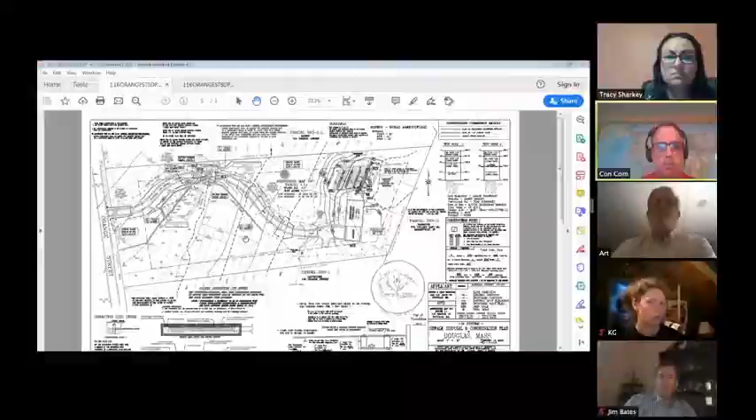Steve, are you there? For Orange Street? Do you know if he's in, Tracy? He was loading up, doing the dishes. Yeah, he's trying to, the other Steve is kind of loud. He's connecting to audio. Am I loud? Let me turn my mic down. Steve and Sue, I think. Oh, yeah, I'm here. I muted them. Yeah, there you go, now it's quiet.

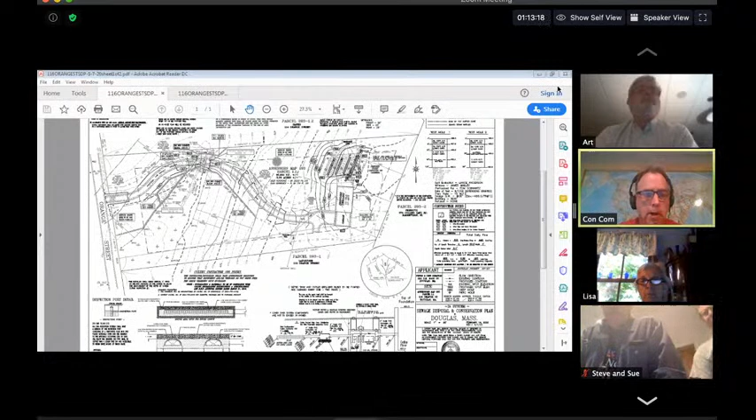Hello? All right, Steve Donatelli, you there? It says connecting to audio. He may be coming in on the phone. Hello, Steve Donatelli, is that you? Ready, Steve? Yes, it is. All right, yes, Steve, how you doing?

Good. All right, so you're first up in the queue, so just maybe give an update. It's been probably two or three meetings. The commission had a bunch of comments that were sent to your board. I think the plans came to the commission last week, so I haven't gone into detail of the changes. One of the major issues, I think, was the culvert itself.

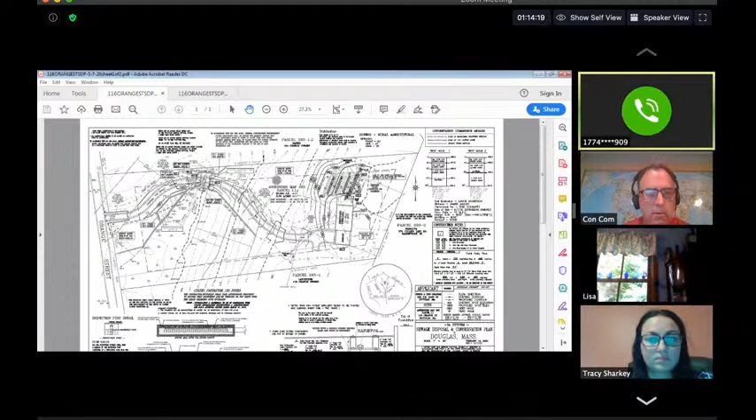Yeah, let's see if I can zoom in. Before you didn't have the stream bank, the stream wasn't marked out. Anytime you have a stream crossing, you have to have what the DEP calls an openness ratio, so you have to have pretty much a three-sided culvert sized enough to let wildlife and habitat and bank flow on either side of the stream crossing exist.

So we're looking for those calculations, the bank to be looked at. There was issues with this runoff, the swale coming down the side, and information on the profile of the crossing itself, the height, the bank of the crossing. The old plan was more of a septic plan, and we're looking more for crossing information. So that's a little bit of an executive summary. You want to give a little more update on what you guys did?

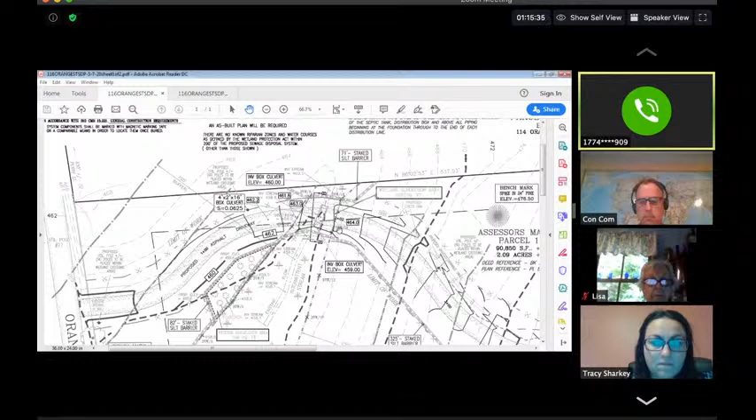Yes, I prior had I think it was 2 15-inch pipes, RCP pipes going out. Right now I've designed a 3-sided box culvert, 4-foot by 2-foot by 16-foot long. Actually, Margaret Bacon designed that for me, very similar to the one she had on Southeast Main Street. I know you mentioned, Steve, you liked that one. So that's what she had sized, and I think I submitted her calculations. Right, what she had, so that's her design.

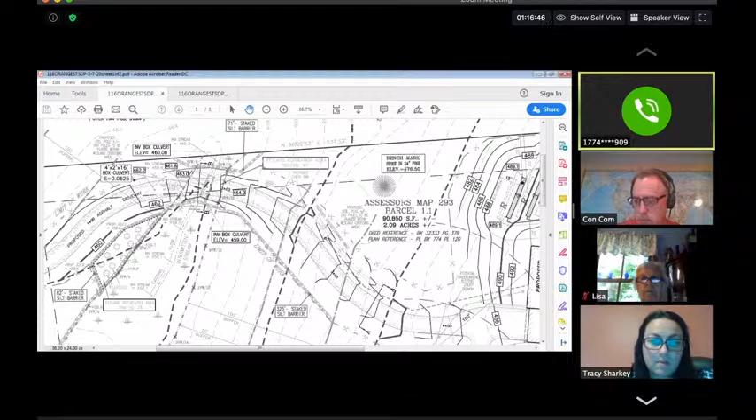Let's see, we had, I added, for the swale coming down the slope, there are now check dams added to the slope, which weren't there before. Had an open swale, I put some check dams along the swale and shortened it up so it's not discharging at the wetland anymore. It's up gradient from the wetlands, about 25 feet. I stopped it short of the wetlands. Check dams along it, I did resize.

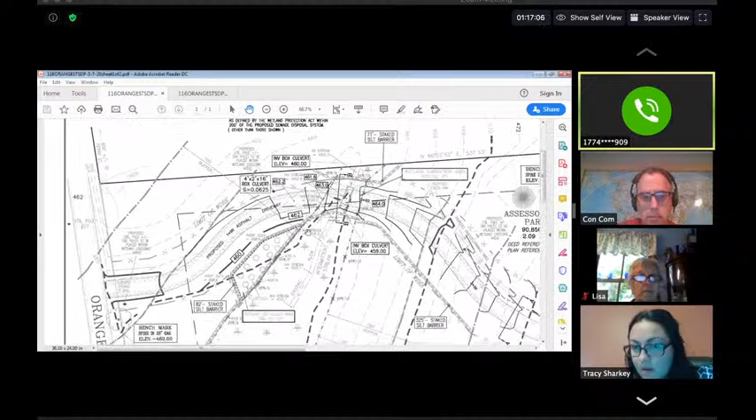The other thing that was mentioned at the other meeting was that the size of the replication area and the species that were in it were left out, but that is now 150% of the replication area of the disturbed area that's at the crossing.

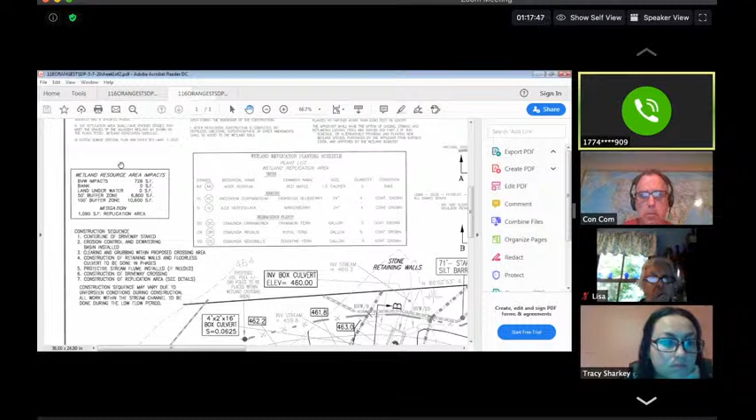And the species are marked on sheet 2 of the design plan. Yes, that right there, correct. Those are the species of the plants that are going to be placed in the replication area, and they're labeled where they would go in the replication area.

Trying to think what else might have been there. It added a lot more detail on the second sheet, which wasn't on the original design plan - a lot of the notes, the wetland replication area, construction sequence, the driveway crossing at the culvert. There's one at the wetland crossing and one in the upland location for the driveway crossing.

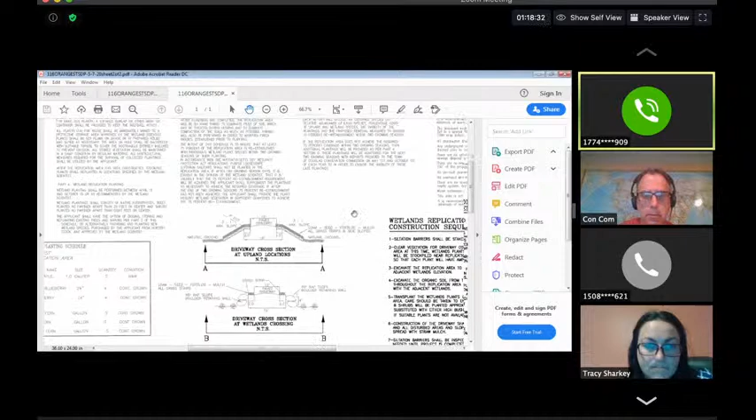So Steve, you went through your checklist. Yes. And the other Steve, yep, you went through your checklist. I originally went through the checklist, but I haven't done it the second time. Because the plan came in last week. But the items look like they've been addressed on this plan. Yep, okay.

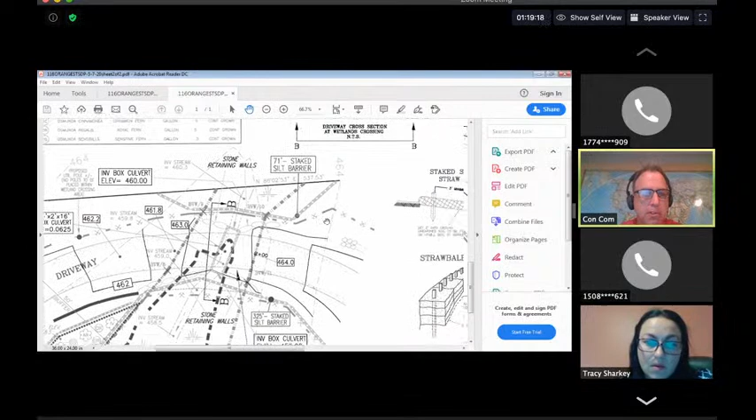And I think I omitted Margaret Bacon. She's here for another project, but if she had anything - I think she did the delineation for the replication area. And I talked to her about the project, the design is similar to the one on Southeast Main, the Pike, which came out very well.

Okay, so board, you've seen the Steve's NOI comments. Hold on one second, let me just get back to you guys. Did someone have a comment on that?

Board, did somebody have a question on this? So we've got the checklist. Looks like the majority of the items were addressed. We do not have a DEP number. Does the board want to schedule a site walk for this project? I would like to do that, and I had a quick question.

I want to be corrected if I'm wrong, but I thought the other site, the box culvert, was much larger. Obviously the engineering could have led to this box culvert not needing to be as big, but this seems small in comparison to other plans we've seen for a culvert. It is smaller - Margaret Bacon designed that and sized it. So it's just a smaller body of water than what we've been seeing. A smaller drainage area.

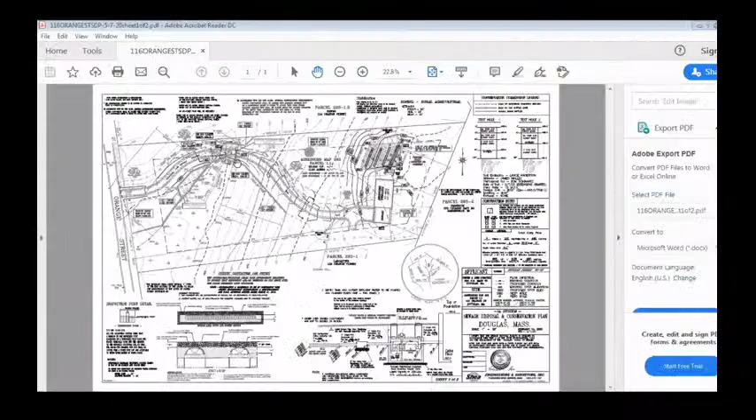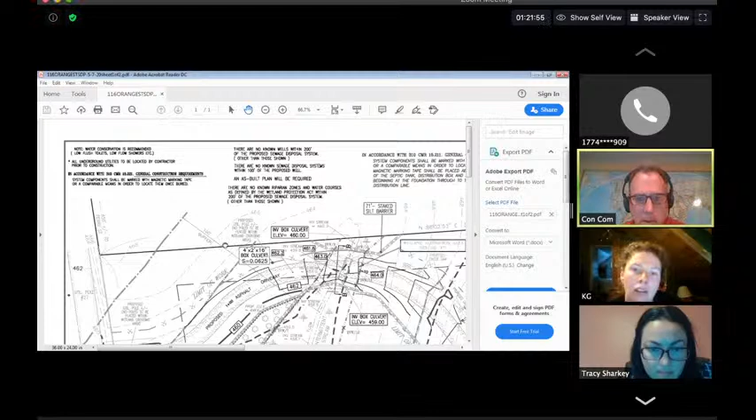To the left or the right? All right, so where are we - yeah, up on top here. So we come in and there's a house here, and there's actually a little stone wall here that created an old pond. There's a pond, and I think that's how it was designed - let me see if I can zoom in. There's almost an impoundment right here of water, and this is where it spills over on an old stone wall and comes through.

I think that might be the reason why it's not as wide as the one on Southeast Main, because that one was almost like a really defined culvert - it was weaving in between a lot of field stones and rocks, and she made it purposely wider just to capture as much bank as possible. But we can go out there and take a look.

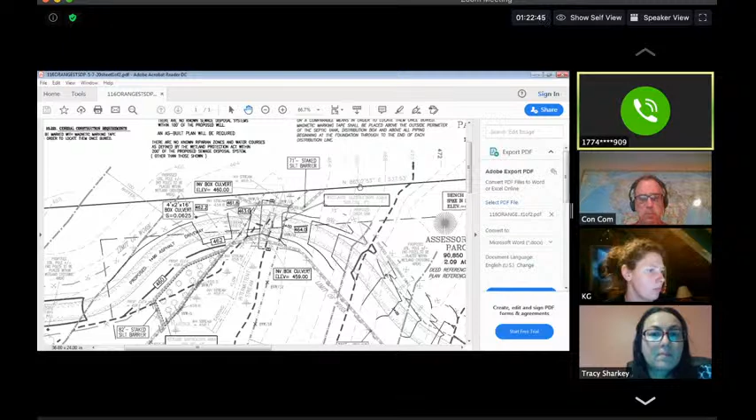And Steve, any reason why you're not getting a DEP number? I spoke with someone up there a little over a week ago, and they said I should have it within a week. I don't know why it's not here yet, but they told me I would have it by today's meeting. So I do not know why it took so long.

Where on Orange Street is this, what are - is this a revised plan?

This is between Perry Street Exchange and the Rhode Island line. Let me see if I can bring it up on the screen. On page 1 of the drawing package in the Google Drive folder, there's a locus map on the right, halfway down in a circle, showing where it is in relation to Orange, Perry, and the Burrillville line. Does everybody see the screen?

Yep, all right, let me zoom into Orange Street. So this is South Street, if you come down South Street and go onto Perry, then come down to Orange, this is Orange, and the lot is right here, next to this house. Next to 110... no, let me try one more time. There you go, it's between 114 and 118.

Correct, so there's only one even number left, 116, yeah, 116 is gonna do it. If you've never been down Orange Street, sometimes it's hard to get to it, but that's it. If you see the town line, you've gone too far.

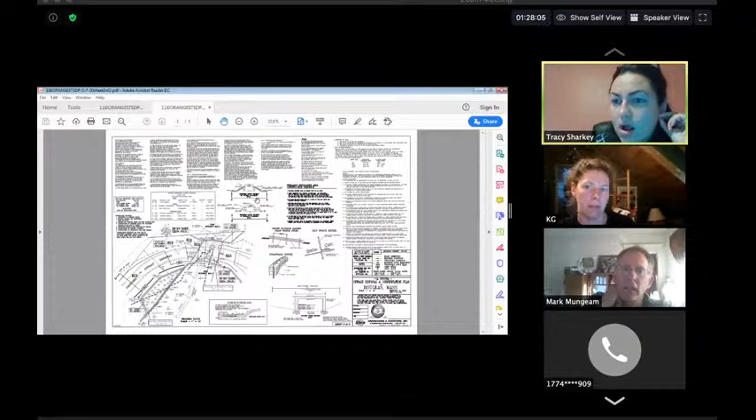So if you got the Google Drive open, page 1 and page 2 are two separate files. Open page 2, and there's a detail for the box culvert, in the center, top center. Here's the cross section, and then below that, keep going down, under the straw hay bale, right there. Thank you.

Okay, board members, anyone else have a question or comment before I move to the audience? I was just gonna say, I like the native vegetation that's gonna be put in the replication area. That's noted, good job. Anyone else? Mike? No? No? Okay, anyone in the audience have any questions or concerns regarding this agenda item, 116 Orange?

Not seeing any, so I'll entertain a motion to continue to July 13th at 7 p.m. So moved. Second. Just a friendly little amendment on that, trying to get back to you.

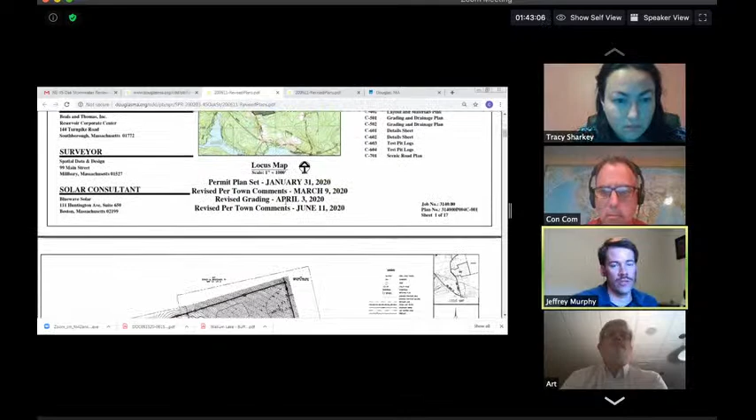One of the changes we made on those plans was with respect to the fencing. We had originally been proposing the 7-foot high chain link fencing, but as part of the dual use goal of this project, to have it be agricultural use along with the solar generating use, we changed it from the chain link fence to a 6.5-foot farm fence that has basically wooden cedar posts as well as a wire mesh, as well as some electrified cables on the interior side, because they would like to have some livestock in here.

So if you were to go to sheet, I think it's C601, Steve, which I think is sheet page 13 of that PDF, I had added some revised details to the plan.

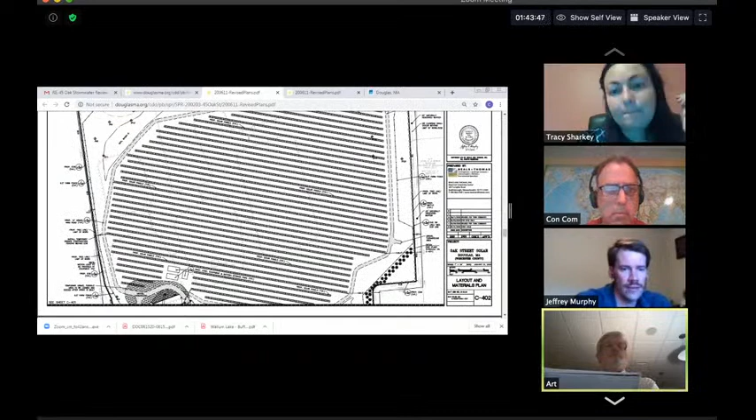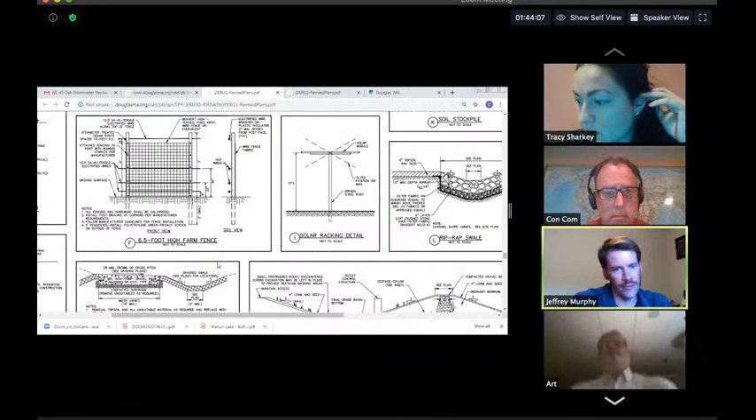You may recall the fencing for the project generally goes through portions of the outer 50 to 100-foot buffer zone for basin off-grading slopes. That's kind of the extent of the fencing that's in the buffer zones. So we drew up this detail here, again having 7-foot high cedar posts, about 5-inch diameter, set in the ground, and then this kind of wire cage on the outside, and then the electrified wires being on the inside. Those openings would be, I'm guessing, about 3 to 4 inch openings in the fencing, so there would be a little bit of room there.

I know we had initially talked about the wildlife gap on the chain link fence, but in talking with the applicant about their goals, trying to also keep out foxes or coyotes getting inside this thing, they were a little bit concerned about leaving that big of a gap under the fence. So we are thinking this would be down closer to the ground, but with the bigger openings in the fence versus a chain link, which has a very small opening, it might still be able to accommodate the wildlife movement we were originally hoping to have there in terms of smaller critters. So I don't know if there's any thoughts on that.

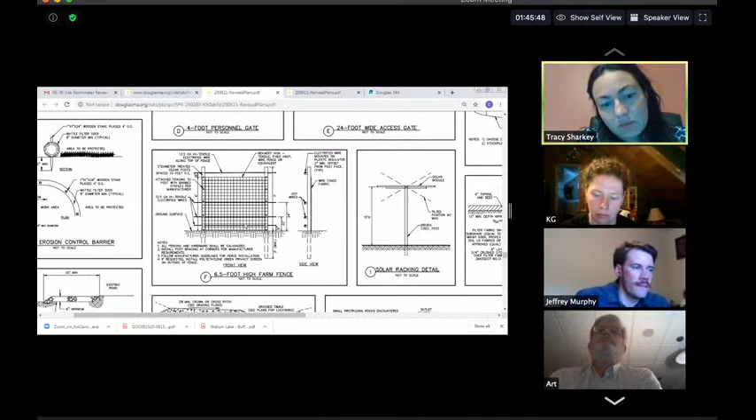There's an 8-inch marker line, so you're not lifting this off the ground anymore. That is my understanding. Steve, could you zoom into the detail, please? Yeah, that 8-inch line is to the lowest wire. So there's going to be 4 wires: one up on top of the fence, and then 3 lower ones, one at 8 inches, one at 22, and one at 34 -- the hot wires. So the actual fencing would be going down closer to the ground on this detail.

We'll have to look at, doesn't DEP have guidelines on this, for wildlife habitat movement with fencing on the solar farm? We saw this the first time when there was the riverfront area, and we did have -- Brandy recommended a lot of that because she was on the board of the natural heritage. I think DEP subsequently might have come out with guidelines also, I'll have to take a look. It's also in the Blackstone Valley Watershed Association publication on the topic -- at least that's where I saw the 8 inches.

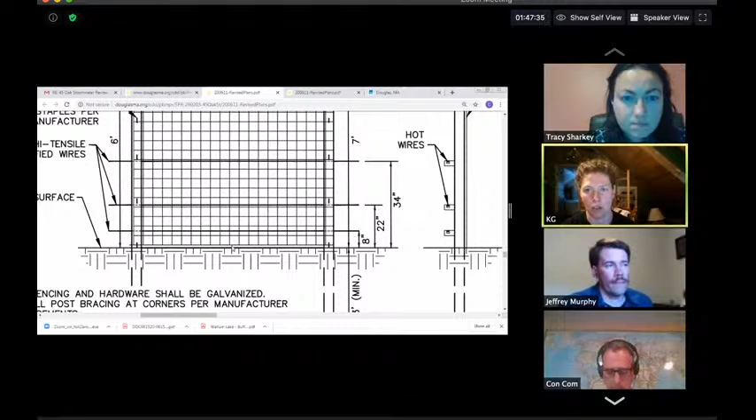So the understanding is if this is dual use for agriculture, maybe this type of fence is a consideration for the agricultural area. But I was initially asking specifically about the area in the wetlands, or rather the buffer zone, the jurisdictional area. I wouldn't expect agricultural activities within the jurisdictional area. Maybe the solution is 2 different types of fencing - one for the jurisdictional area where wetland species might need an 8-inch passage, and another type in the agricultural areas.

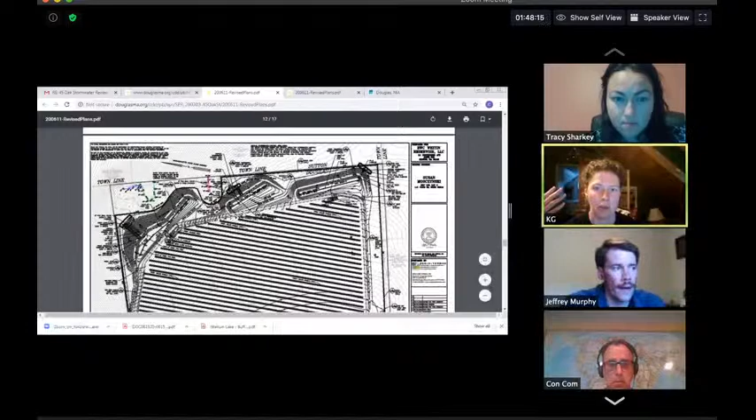I understand why you want this for dual use, but our expectation is - I don't have the map, but I can pull it up again. It's a small area that this board is concerned about for wetland wildlife. For example, the turtles and wetland wildlife species aren't particularly interested in your agricultural area - they're interested in accessing the wetland areas. So again, maybe the solution is 2 different types of fencing.

Jeff, could you look into that?

Yeah, I'm thinking about this in terms of maybe having a fence that's closer to where they're going to be having this agricultural use, because right now the fencing primarily runs on those basin off-grading slopes and down there. So like Katie suggested, maybe there's an option where we look at 2 different types of fencing - something different in the buffer zone, but also that level of protection we're looking for higher up or away from there.

Yep, that's something we can talk to the applicant about and see what suggestions they have to address that.

Hey everyone, this is Matt at BlueWave. I can address a piece of that now, just to talk about where our desire for this is coming from. The agricultural operation will be putting in temporary fencing around where you see the access road, because that's where the actual operation will be done. You're correct that we won't be using the basin area or areas that really encroach upon the wetland for any agricultural purposes.

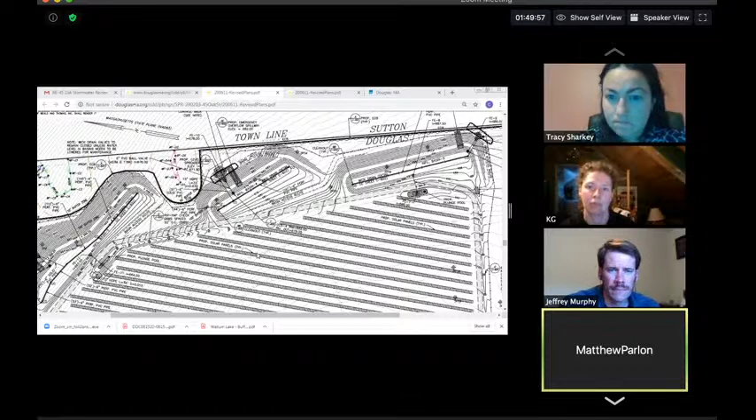But we'd like to keep the security aspect intact, because if we raise up a portion off the ground, that becomes a place for predators to enter, and we'd need an entirely separate agricultural fence to keep them out all along the interior. It becomes a lot of extra material just to provide that 8-inch gap in one area, because then it's an inlet point that negates the fencing's purpose for the rest of the array.

Would you be able to provide some documentation for your position on not lifting the fencing? Just a quick suggestion - is there a reason, what's the purpose of the fence, livestock? No, in general - are you protecting the detention ponds, or are you protecting the solar arrays? Do you need it that far out? Can you just move the entire fence so you don't need to protect the detention ponds from wildlife, but just start it so it goes around the access road?

Yeah, that's more for operations and maintenance, just so that you have that contiguous area with which you can have access to.

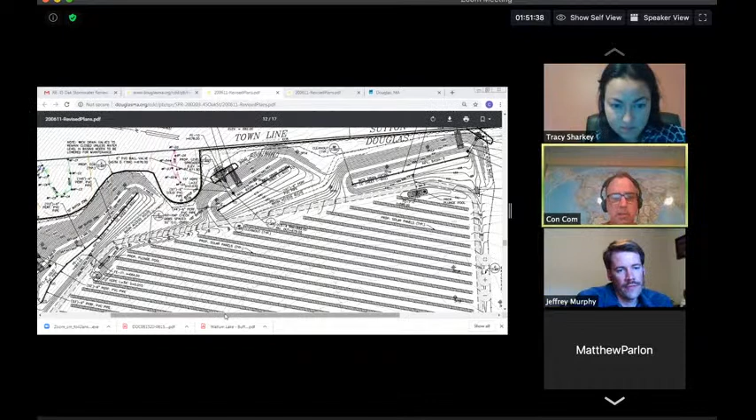Jeff, you know what I mean? Yeah, I mean Matt, would it be a possibility to have the fence be, you know, between like where the basin is and the access road, and then have gates so that you could access the lower outlet areas for maintenance? Is that a possibility?

Yeah, we could look at shifting that. I don't know what the commission feels about that, but when you have the fence down on the down slopes, it's just going to get overgrown anyways, and you're going to be weed whacking and maintaining that area, whereas if they brought it up into the access road - just a suggestion.

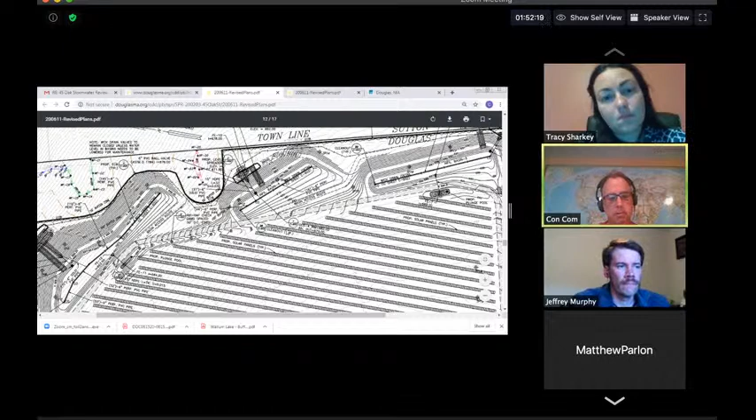You're talking about not fencing in the detention areas? No, I don't know if that's a safety issue. There's different fences for different reasons, and I get that you want to fence around the project for the liability of the project, but that fence can have a gap underneath it, right?

Yeah, so you could do a double set of fence - even though Matt was saying he didn't want to do that - but if you need the security and safety, you could do the lifted fence around the detention ponds.

So what they're saying is they don't want coyotes climbing underneath the space by the detention ponds and wreaking havoc through the solar array. So they would have to set up a second fence around the access road to totally enclose the solar array from large animals. Is that correct?

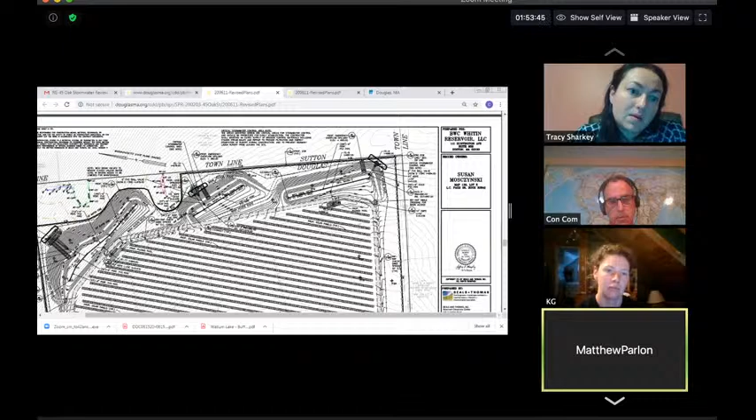That's correct. At that point, I guess all we'd be buying with having the fence raised up on the other side of the basins, but then to have a non-raised up fence 100 feet interior of that, you're buying that extra access 100 feet.

I'm not familiar with the wildlife guidelines. I'd like to see what they have to say. Did the applicant take a look at those at all?

Our understanding was just that the spacing of the wire gauge would allow for the small animals - that was really more of the intent of that gap. Could you send something along to Steve? Sure thing. So if that's the case, if this type of fencing is approved, then I think I'd be open to the different style fencing.

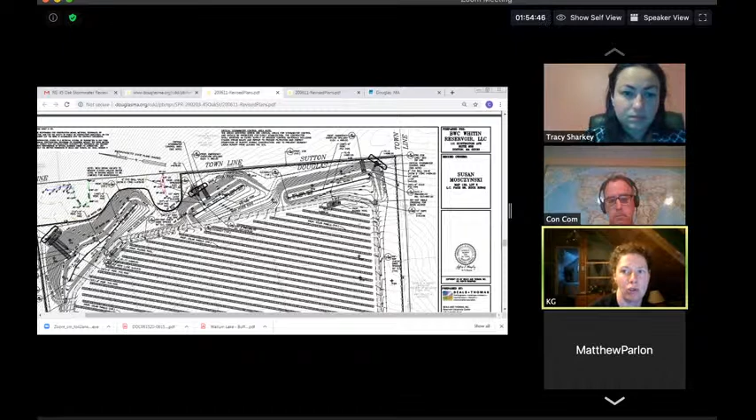I just don't know if it is or not. Katie Grace, did you read those regulations? Yeah, mine is based on the Blackstone watershed, and the understanding is that you're trying to allow passage of a critter that may be as many as 8 inches in diameter.

And what was that guide? I'm talking about - the Blackstone Valley Watershed Association pointed it out to me, but I think it's the Corridor - yes, Blackstone Valley Heritage Corridor. I'll find the title of the document. I know I've referenced it before. I used to carry a hard copy to meetings, but now I don't have it.

I'd be open to seeing any documentation, but our expectation was always to have it lifted for the movement of the critters.

Jeff? Yeah, Matt? We can definitely look into that and see if we have documentation there, what might be able to be done, or if we may have to explore alternative routing of a portion of the fencing. So we'll look into that. If you could provide us with the information sooner than later so we can review it and be ready for the next meeting.

Any other changes that you wanted to mention? I don't believe so. I think the only other changes were all kind of outside of the commission's jurisdiction - mostly just related to site plan review comments.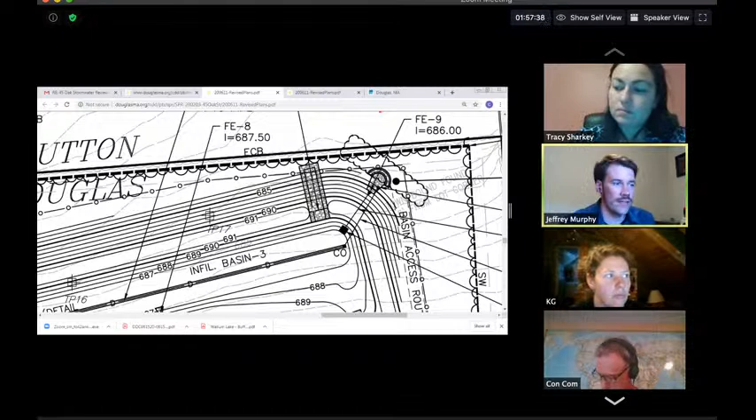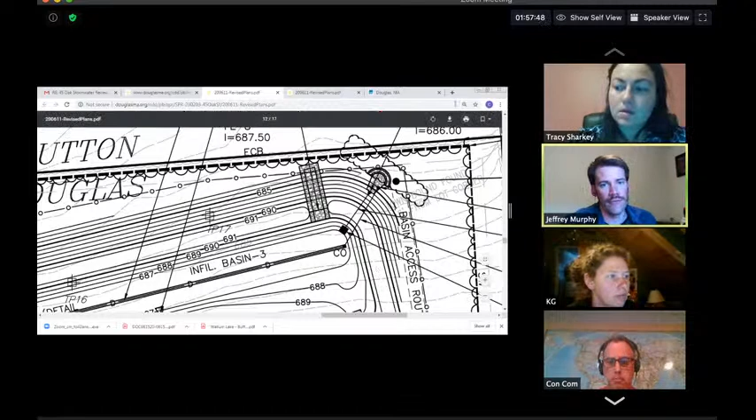But in the event it does have water coming out, we want to make sure that water is going to flow clear of the abutter's house and property there. So we've moved it to make sure it's going to be well clear of where their house is.

Okay, so Board, do you have any questions? I have one question - I had asked previously about the amount of imported fill to the site. I wasn't sure where you stood on that and wanted to know if you had a number.

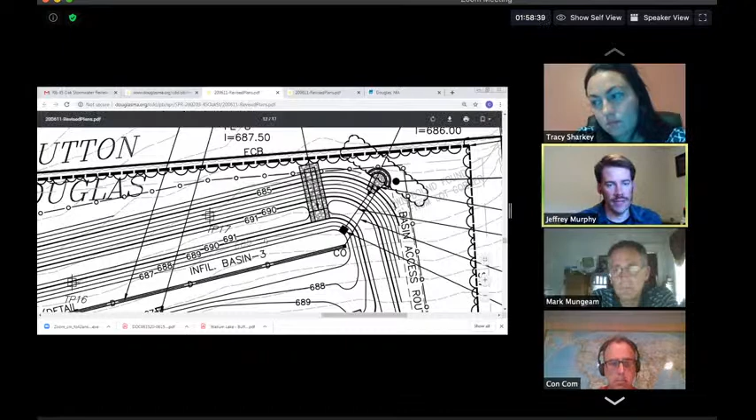Yeah, so we did run an earthwork analysis based on the initial design we had, and it was a pretty significant number in terms of the amount of fill required to build up these berms as a result of the site soil conditions. We basically had to design all these basins at or just above existing grades, so these berms are entirely constructed of fill, which means we have to bring a lot of material in to do that.

So in order to reduce the amount of import, we actually changed the grading on top of the site here. If you scroll down, Steve, you'll see we added some grading on top of the hill - those oval contour shapes there. So we kind of planed off the top of that hill to generate material they can build the stormwater basin berms out of.

So it was in the ballpark of about 20,000 yards of material required to build these berms. We should be able to gain a good amount of material from shaving the top of that hill down flatter and generating that, so we have to reduce material import to try to balance out the site.

Jeff, is one of these sheets have the construction sequence plan on it? Yeah, so that should be sheet number 7 of the PDF, so it'll be C301.

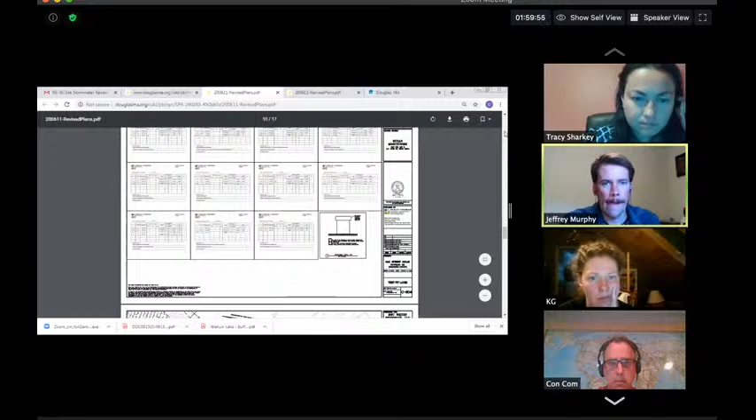So I added all those notes that we talked about in one of our early meetings to have a construction sequencing. What sheet was that? You're on it right now, Steve - C301. So in that lower right corner, we added all the sequencing notes that the commission likes to see to that sheet.

So it basically says that they're going to need to build the stormwater basins first because we want those to be in place before they start doing full site grading. They're going to have the erosion and sedimentation control barriers installed first and foremost. Those will be reviewed by you, Steve, before any construction begins. There'll be a pre-construction meeting with the applicant.

So once everything's been approved, they'll be able to start doing site clearing operations. And then they'll establish their temporary crushed stone tracking pad at the edge of the site to make sure they're not tracking any sediment onto the street. And then they'll start clearing, grubbing of stumps, and then they'll start doing the bulk earthwork for the site.

So they're going to have to go in and start prepping those areas for the stormwater basins. They're going to actually have to generate some material off the top of the hill first, so there'll be some movement of earth to access that material. And then they're going to have to truck that around to build up these basin berms so they can get those built.

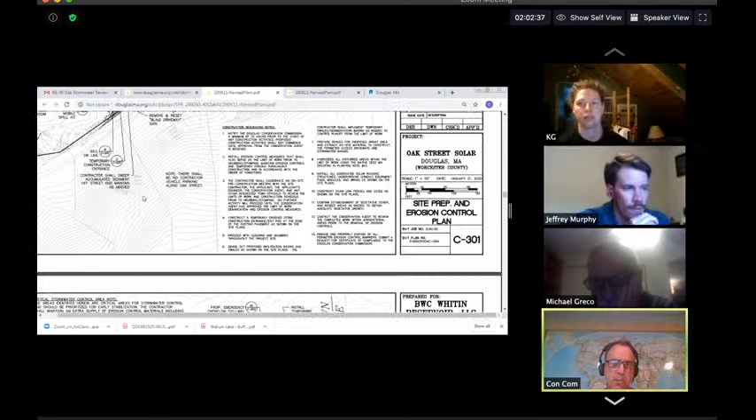But then there is some additional tree clearing, mostly to the south of those existing fields and a bit to the east. So some of the big concerns is during construction and while they're grading.

So are they just going to grade the top of that area? So this is the area of the first detention pond that's closest to Oak Street. Are they going to concentrate on completing this first before they finish any other work on the site? Is there going to be, as they're constructing this, during, the duration could take a month or two to construct the pond.

What stormwater prevention is protecting Oak Street and the neighbors, and the drainage down gradient from Oak Street during construction of this pond? The first line of defense is the perimeter control, so the silt fence and straw bales, with the ECB line there at the edge of the plan being the down gradient, last line of defense.

And then we're proposing on the hill, you can see those dark dashed lines just above the basin. We're going to suggest that the contractor use stump grindings, those work really well in slowing down stormwater as it comes off of a site. So we're proposing these stump grinding berms, spread out linearly across the slope.

What that's going to do is provide speed checks and slow down and filter that runoff coming off the site while they're working on building up that berm, which is then going to act as a temporary sediment basin until they can get it fully graded and established. So the contractor will have to be very vigilant in monitoring that area and that portion of erosion controls, and again, they'll probably want to use stump grindings down there to make sure that area is very protected.

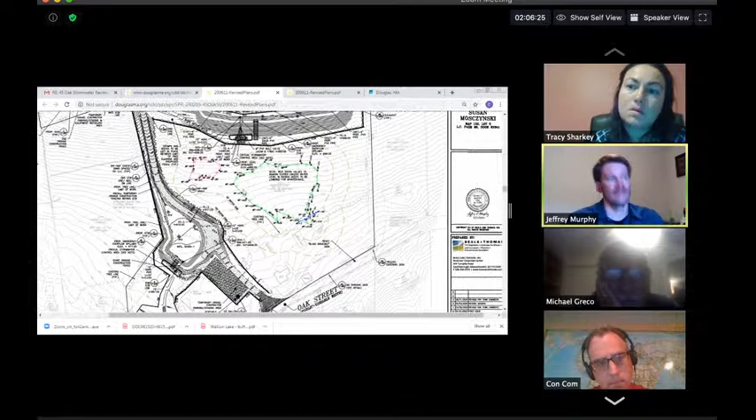So I envision that's going to be much the same process. They're going to start out at Oak Street, and then build their road in. Fortunately there's already an existing road for a portion of this, but they'll basically be improving that road, making it more resilient for truck traffic and things. So they'll have to prioritize building that first basin, doing those road improvements so everything is in place concurrent as they work their way in. Once they get that area established, then they can go up top and start working. So it'll be a progression.

Right, so I don't see that sequence detailed, like saying the lower part, just what you talked about, progressing from Oak Street up and making sure this area is protected, and then this is constructed first, in the plans. I'm not the PE, so I'd leave that up to the review of the stormwater, but sometimes the construction sequencing is critical just because who knows how long it's going to take them. And if this isn't 100% complete and collecting all this runoff during storm events, if it's not there, then you're fighting this hill the entire time while constructing everything else.

So, yeah, our sequencing notes were a little more generic, just saying after the erosion controls are in, we're establishing the temporary tracking pad, and then we're commencing with the clearing and grubbing.

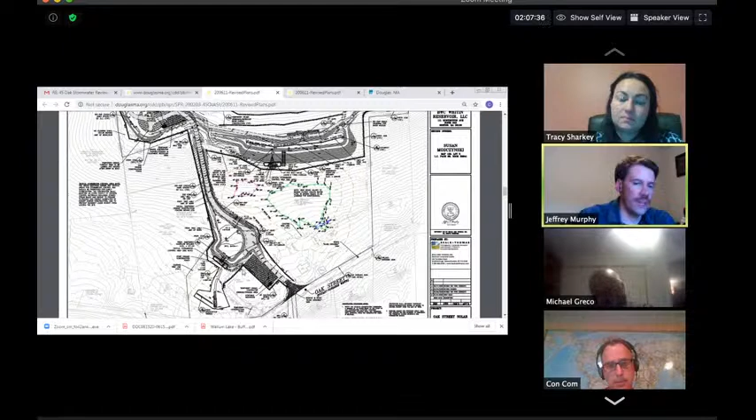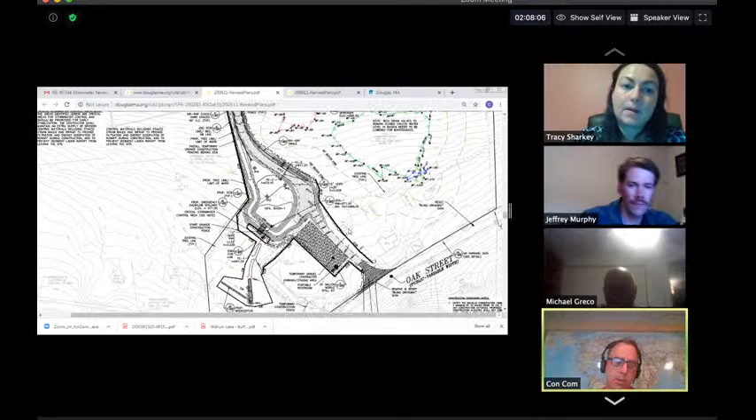So they have to clear a little bit of a corridor to get in there, and then they're going to have to do some earth moving and importing to build up that basin berm. So we just said grade out proposed infiltration basins and swales, but we didn't necessarily say do this one first, do that. We didn't prescribe a specific order, but we could add a clarification for basin one. I leave that up to the commission, but it seemed to work on the other solar farms that the ponds and basins closest to the resource areas were done first, but this one is more closest to

Oak Street, which helps protect everything down gradient from this area. Because I know in the other ones, at least on West Street, you couldn't do anything until the crossing was in and the ponds were complete. Right, on that one there weren't any BMPs until you got across the wetlands. So you had to build the bridge first, then they could go across, then they roughed in the road, got the road built, then built the basins, and went from there. Right, worked their way in, basically.

That's right. So I envision a very similar strategy and approach being used here. If you can make that a little bit more specific, I think we'd appreciate it. Okay, yes. I agree with Steve, the sequence plan needs to be much more defined given how much disturbance area there is on this site.

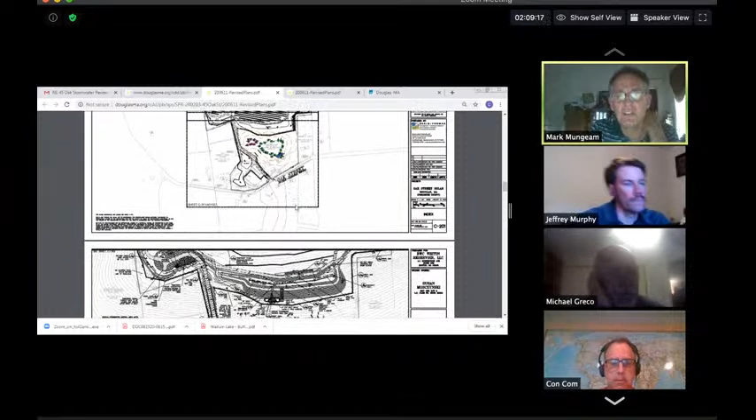And just to go back, I had asked a question about the amount of imported fill, and Jeff, you started to say how much it was. You said there was 20,000 on the draft plan, then you decided to cut the top of the hill, but I didn't catch where you said how much the imported fill was changed. You said it was changed substantially, but I didn't hear what the quantity was.

Yeah, so there is a certain amount of import volume. I apologize, I don't have the notes in front of me with the specific numbers, but there's a pretty significant amount of import from offsite for the gravel roads themselves. Because that material isn't going to be able to be generated from on-site. The soils are not very good on this site, unfortunately. So it's something in the neighborhood of 7,000 to 10,000 yards of gravel that's going to have to come in regardless.

But then in order to balance out that, it was about 20,000 yards, we said okay, if we cut the top of the hill down, then that's material we can just source right on the site, because we want to reduce the amount of import for the project overall for costs and efficiency purposes. So that was attempting to offset the fill required for the basin berms.

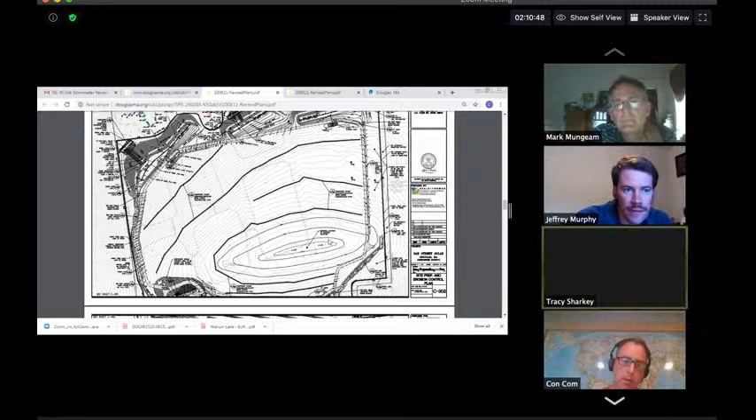Sure, yep. So you've done a grading plan. You don't know what the cut quantity is on this plan? I have it, if you give me a minute I could probably find it, but I don't have the notes with the specific numbers right in front of me. Let's see if I can. We'll give you a minute, Jeff. Okay, this is from a little while ago. Let's see if I can find the email.

Will all the grading areas be re-topsoiled? Yes, everything is going to be loamed and seeded because we need to have grass growth here. And again, for the dual use, we're going to need an arable, usable, growable soil medium for that haying agricultural use to happen. So they will have to loam and seed everything. And we obviously want that as well for stormwater purposes, to reduce stormwater runoff, to have everything fully vegetated.

So all the hay fields that are pre-existing are going to be ripped up and then reloamed and seeded? I don't think they're really going to have to do any grading within those existing fields, so those should just be able to stay as is. But as you'll see, those hedgerows between the fields have some trees and brush, and probably some stone walls and things. They are going to have to cut that down and basically just smooth it out. But the fields themselves, they shouldn't really need to disturb those at all.

In the area where they do cut the top of the hill down, any topsoil that they strip off, they're going to have to stockpile it, and then they're going to extract the material below and spread it back out from there.

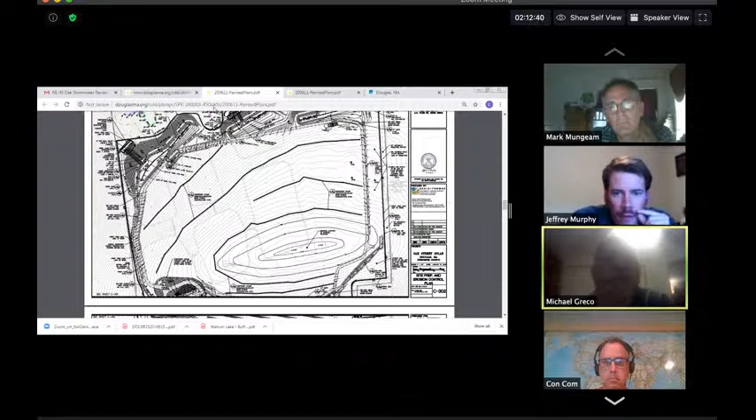Oh wait, here we go. I think I found it. Let's see, the gravel. Yeah, I think we...

Make sure I'm giving you the right number here. Gravel roads. So, looking at the board, anyone else have any other questions?

Art? No. Mike? No. Eric? Nope. Where'd Katie Grace go? We've lost her. She flew the coop, she'll be back. Let's see if she's still up there. Not in the waiting room, right? No, I don't see her there. Well, I don't see her anywhere. Somebody just came on.

Jeff, do you have that Mark number yet? Mark Mungeam just muted himself. Yeah, and that's okay. I have dogs that are barking a lot, so I keep muting. Me too. Do you have any other questions, Mark, besides that import fill question? No, I do not. Okay, all right.

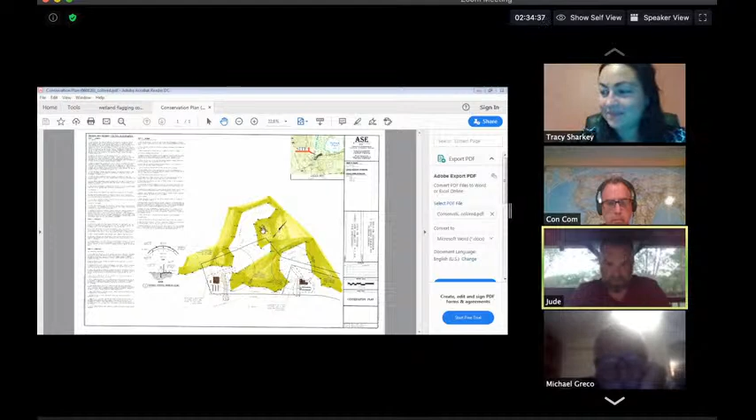So just north of where your hand just was, see where it says Cedar Swamp? Right in that area, he added another flag. Upland, between 13 and 14. Yep. He added another flag in there that projects further into the upland area. But you see that the work is well further away from that.

So I can show that on the plan for the record, but it doesn't impact the project itself. B, he said that wetland flag 17 was missing and he added one, 17R. So right to the north of that 17, he added one to the left of it about 20 feet. Same thing - I found 17, it's pretty thick out there, but I found it. He may just not have seen it, but I do agree that it's in the wetland area. So moving that out to the left about 20 feet doesn't pose a problem, and there's no issue with that.

Again, that's far away from the project zone itself, but we can certainly update the plan to reflect that. The next one, C, the distance between 20 and 21, right where your hand is. He said it's about 200 feet in area, and it may cut across some of the wetlands and should be redelineated. We certainly can - it is a pretty thick corridor. We looked at the toe of slope in that area, and it pretty much rides along that straight path, but we'd certainly be willing to look at it. Again, if there's another flag added to the north, straight up through your hand, it's going to project into that internal space where that 50-foot buffer zone kind of collapses onto itself.

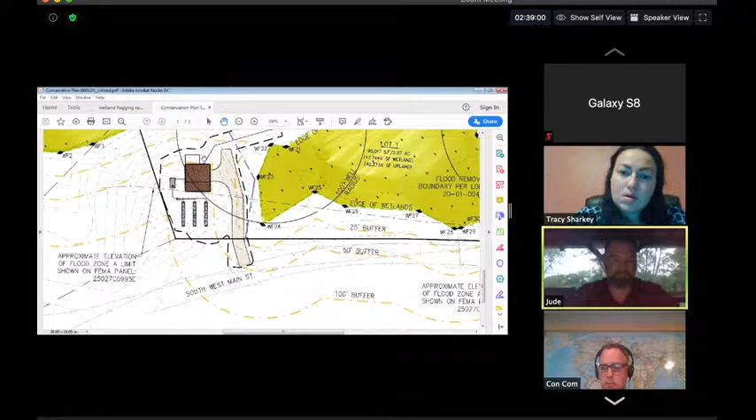The first two, A and B, he rehung flags where he wanted them to be, and then he didn't on C and D. So I was wondering if it was significant enough to even move. I guess we could ask him, but right now you're holding 15 feet from the finished drive edge, so you've got 5 feet to play with essentially. I was just confused because he revised some and not the others, but we could certainly look at it.

Well, that's why I offered to have you guys walk it with me. That was the point.

Right, so board, after reviewing the list with Jude, let's go down the line. Does anybody have any comments or questions, starting from the first comment from Art?

Tracy, yes, there's one more item. I wouldn't say it's insignificant, but it's the last item, E, between flags 28 and 29 where the culvert crosses the street. I believe the abutters asked about it at the last hearing. He just suggested moving 28 and 29 right up to the culvert, because that's technically where the water starts to come out of the culvert.

Correct, again, no problem with that, but I just wanted to finish the list up. Okay, sorry about that, I don't have the list, I have the plan. No problem. Okay, board, questions? It's a tough site.

We didn't get anything back from DEP in regards to comments, right? They issued numbers, and their comment was to either provide the ANRAD, which we never did, or provide documentation for the wetland flags themselves.

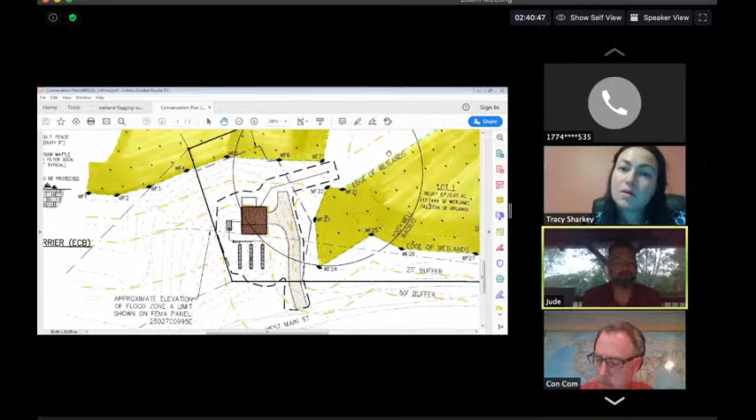And actually, thanks for bringing that up. So I talked to Margaret Bacon, who originally delineated the wetlands, and she said she did not do any flags per contract with Aaron—I mean not flags, sheets. She did not do any data sheets. She did everything based on topography and the hydric soils. So there are no data sheets in existence to supply to the commission.

Steve, is that a requirement for the filing? It just helps supplement the accuracy of the delineation, but given our third-party peer review, there weren't too many changes to what Margaret did. Okay, I don't have an issue with it, but for DEP's file, they're asking either for an ANRAD or for the documentation.

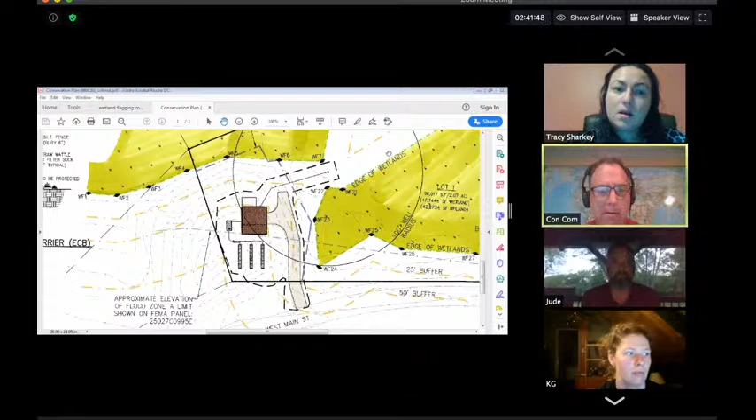Is that a suggestion? Is that a comment, I forget? I don't have the specific wording, but they said to provide reasoning of why the flags were placed where they were. Maybe it's just a simple letter. I would say we didn't have that, and we had a third-party peer review—give them Art's review of it. That's where I was thinking too.

And are you going to revise the bordering land subject to flooding in the permit, or do you think it's not enough to do the revision? If you want to scroll over to lot 2, we can look at the exact area I'm talking about. As far as the guidelines go, for filing, the compensatory storage accuracy—you said buffer zone only. And is there no way that you can just remove that out of the bordering land?

We could look at doing it, but I'd rather, if that's the way the applicant wants it, I could provide documentation and maybe revise it. I'd have to look at the regs. Unlike wetland filling, where people are allowed to fill up to, I think, 300 square feet of a finger-like wetland.

I'm not sure that's applicable to floodplain, so I'd have to look at 1056 maybe, CMR 1056, bordering BLSF requirements on compensatory storage. Yeah, it might be, you're either in it or you're out of it. And if you're in it, you have to do some compensatory work.

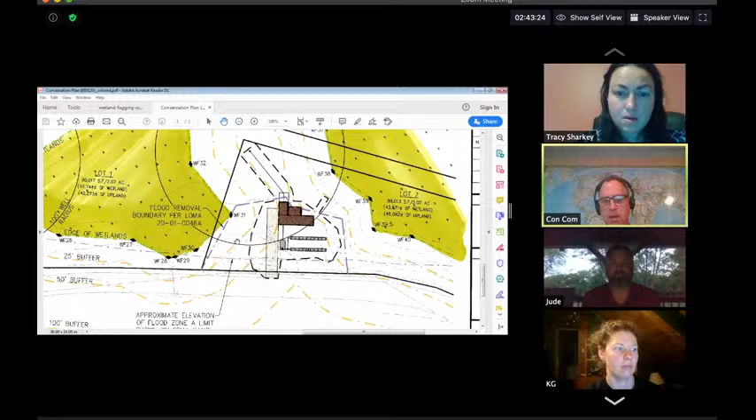I'm not sure if the commission has the option of doing that unless it's a limited project. Yeah, I'd have to look at that too. It's been a while since we did floodplain filling. I don't know if a simple design change could avoid that, and then you wouldn't need to revise your filing. I'll discuss that with the client and see what he wants to do.

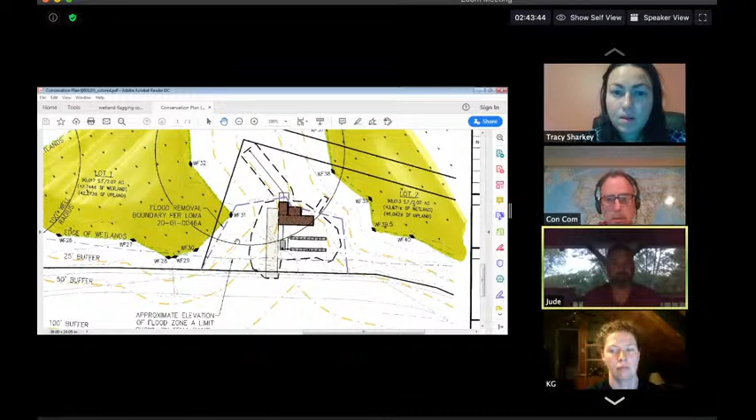So what is this area right here? Right where your hand just was, there's a retaining wall on the right-hand side. See that thick black line? Go to the left a little. Right there, that's a retaining wall. So the house is above that, it's just open underneath. There's a little projection or retaining wall that goes from that purple line to the yellow line, over to the right.

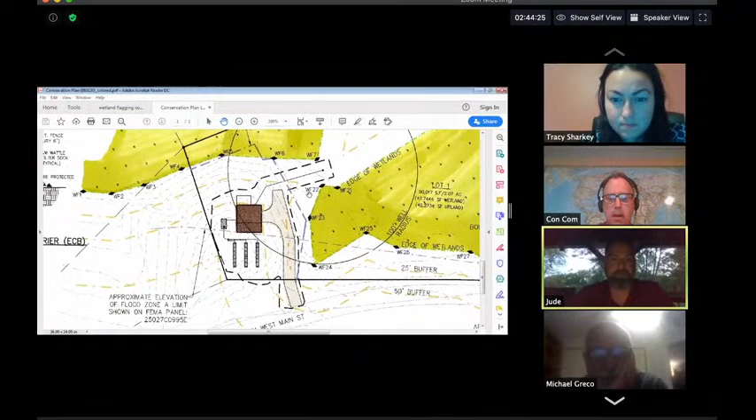Maybe I'll bring up the other plan. If you bring up the septic plan for lot 2 - well, in bigger scale. We're in lot 1 now, so let me bring that up. Oh yeah, that's right, just 2 hearings.

Board questions? I had a question just regarding the trees that were taken within the wetland area. Is there anything we can do, do they have to warn us before they do that, or?

That scenario that I think Aaron was referencing, it's taken me back about 10, 15 years from the last time someone invoked that. I'd have to take a look at the regulation that gets more into chapter 61 and chapter 61A, Mass general law - it gets more into woodland and wooded forestry. There's a couple of different scenarios or regulations you might be invoking - woodland management - but that doesn't always take precedent over the Wetlands Protection Act, sometimes it doesn't, but there's still a filing maybe necessary before they do it, so you could be right. I'd have to look into that.

Okay, just I believe because there's a filing. Yeah, I mean, you're right. A lot of times, just because you might be exempt or you might be permissible, you still have to go in front of the board to show them that you meet the requirements.

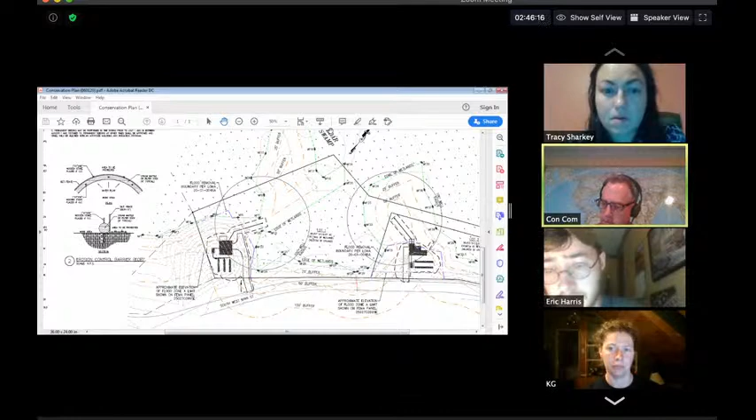Right, so that maybe would be an open space item. Yeah, so either that, or maybe Jude, if you can get that from Aaron, if you could be a little bit more specific on regulations that he was citing. Yeah, that's a new one to me. Aaron seems to be the expert on that, so I'll ask him what.

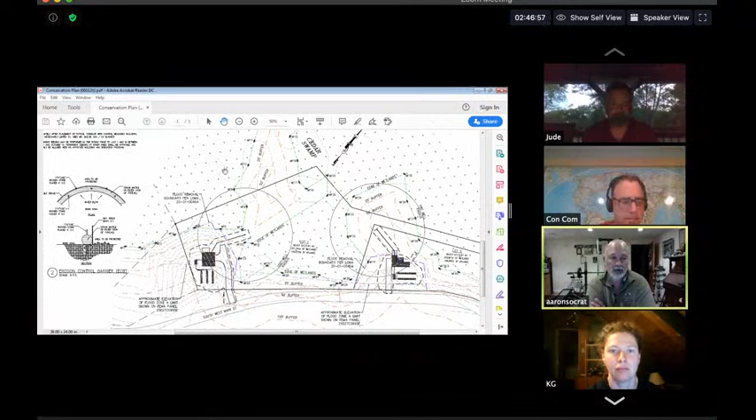We've invoked that before on our other property, and I thought we were permissible for owner's own use for wood stove up to certain limitations under guidelines. So we were before the board once on another property at the farm, and we were told it was a non-impact or some term. So it was like 6 trees, oak trees particularly, burning in my wood stove with help from Nick. That's exactly what I did, and I thought it was permissible because we went before the board and found that to be not an issue because it's covered under some guidelines and we had the paperwork. So that's fine, whatever y'all want to do.

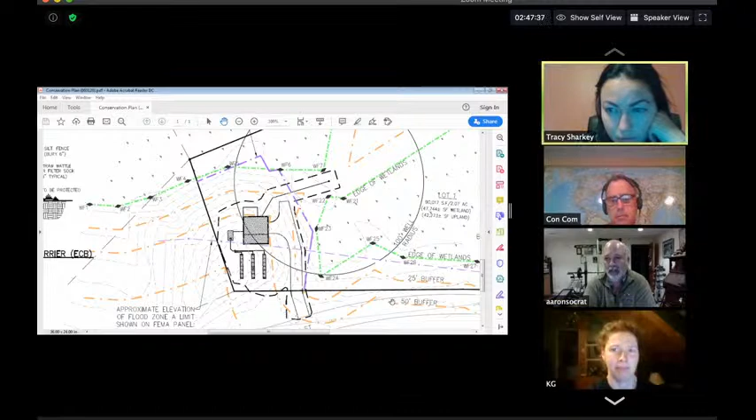Yeah, it's like 6 trees, in different locations, it wasn't even concentrated in one location. And it was within the 25, it wasn't in the resource area. I'm telling you that we were not in wetlands. Well, we didn't have - again, I know that wetlands doesn't have to be wet to be wetlands, and it doesn't have to be dry to not be wetlands. So, but we didn't even have boots, I had shoes, so I don't know. It was upland in my mind, but I wasn't going to go walking in the bramble. Well, it was oak too, and they were oaks, and it wasn't like underbrush or anything like that. These were pretty good, like probably 10-inch trees. And we actually went thinking where the houses were going to be, and that's where we did it. That's where I did it.

I know a little bit, and a little bit is the house is being removed, so take the trees that are in the house footprint. I wasn't walking into the wetlands 50 feet in to drag pieces of a tree out, 200 feet from the wetlands. So in my intent, it was not that, it was at the house lots. That's where I was, I thought. Okay, all right, we'll get some more documentation on that.

I'm not seeing anything with the amount of disturbed bordering land subject to flooding. I'm not seeing anything, Steve, in the code on that, being exempt? Yeah, no, I see that it's presumed and the presumption can be overcome by a letter.

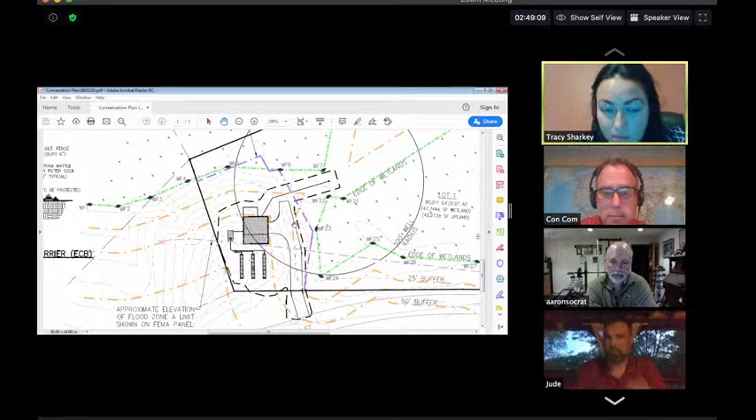I would suggest revising the layout to take that out, if it's only a little tiny bit, because there's a presumption that such an area is significant. The presumption is rebuttable, may be overcome only upon a clear showing that said land does not play a role in protection of said interests. And then the issuing authority shall make a written determination to this effect, setting forth its grounds, Form 6.

So I would see what the applicant wants to do, but I'm not seeing anything in 10.57 of the Wetlands Protection Act, 310, the compensatory storage section. I don't know the exact section reference, but it's where the floodplain is. Basically, if you fill a cubic foot, you have to take a cubic foot out at the same elevation. So that's easy. I would either have a plan or revise it to eliminate that section. I believe so, unless there's a compensatory storage waiver of some sort that I'm not seeing.

Okay. Just real quick, is this your final plan? Is this the plan you want me to review, your revised plan, or do you have a more detailed one you can submit? The detailed plans are the septic plans. Okay, those haven't changed? No, sir. Okay.

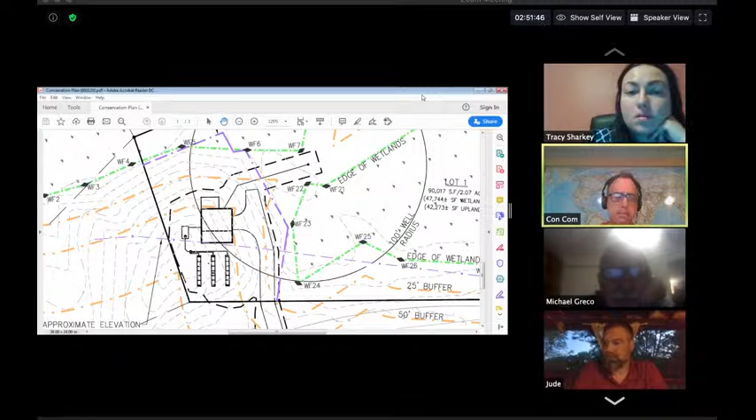Steve, are those sufficient for detailed plans? Well, I'll take a look. If you can just send me, so I have the latest and greatest in case it changes, the two septic plans. Sure, that'd be great, I can send those. All right, Mike, do you have any questions? I'm okay. No, Katie, Grace?

No, I think we were talking briefly about vernal pools earlier, and that was something that Art thought there was, but then Jude is saying that we don't think that's a concern. There's nothing certified, and there's no reason to believe that there's any in the area. There's no potential. The word potential was not used, it just said ponding areas which are likely to provide vernal pool habitat, which seems very general. Just because the area hasn't been surveyed.

Do you know where those are on here? No. Jude, where? I don't honestly know what he's talking about. It just seems like it's part of his review letter. Think it's more of a BVW? What's that? Think it's more of a BVW? Yes, okay, all right.

I mean, we can see, Katie, Grace, we can see when we go out there too. That was my next question, did we schedule a site walk? Because I don't have it on my calendar. Not yet, we are waiting for the peer review to come back. And I have the survey crew scheduled to go out and put some stakes in for the foundation for the houses and some general location for driveway and septic.

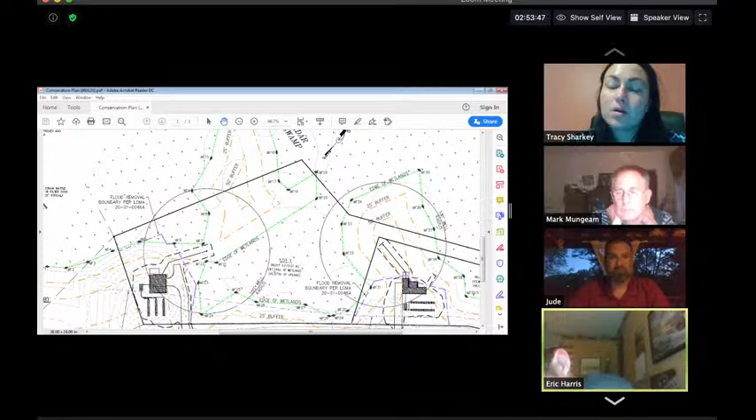Okay, yeah, I mean, we might as well piggyback the meeting on this Saturday, if you're gonna be ready. We'll be ready. Mark, do you have any questions or comments? No, they've been addressed. Okay, Eric? I'm all set. All right, well, I guess do you want to book that? We could do a site walk after the first one on June 20th. Yep. Board? Great, sounds good.

And then any questions from the audience or concerns?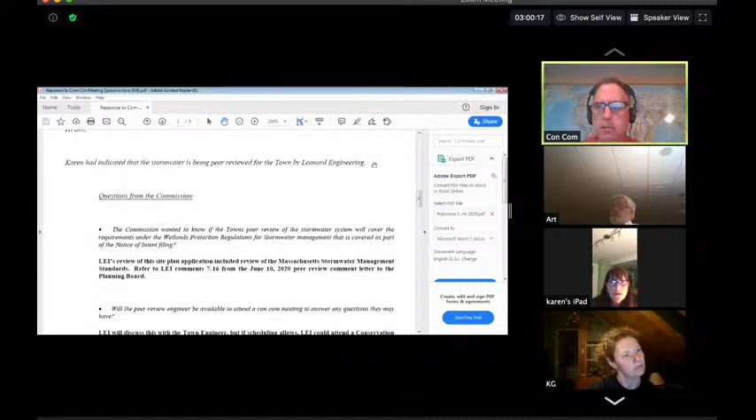I'm interested, Steve. Okay. So at our last meeting on June 1st, the commission had a few questions regarding the peer review. As you can see, the peer review is according to the DEP stormwater checklist, which is a very integral part of the stormwater design and report, and the standards are to be met.

The peer engineer has answered the questions as they've been listed by Steve. There was a question on the size and depth of the stormwater interceptor. The size is roughly 50 by 50 feet. I have Paul Hutnack, the engineer, on the line with us this evening, and he can answer some of your stormwater or engineering questions. The depth of that interceptor is at roughly 101 feet, according to the elevations on the plan.

On Friday, I was out on site with the soil evaluator and the third-party engineer, and we did some soil testing out there. The depth of the groundwater was more than 11 to 12 feet as of Friday. It has been sent out for soil sampling, for permeability. It is pretty much bank gravel out there, very permeable.

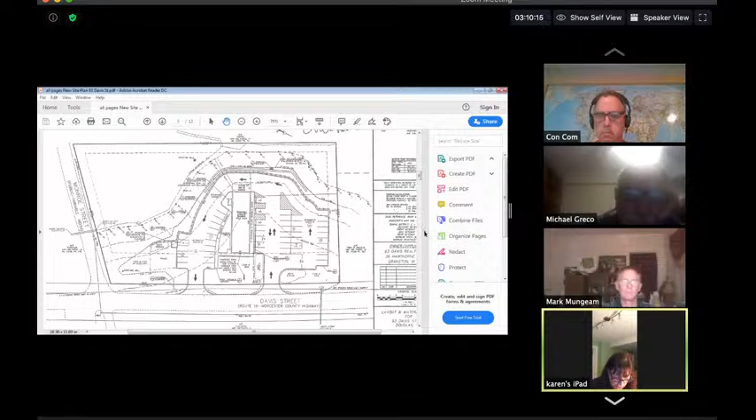We are asking for a waiver from your bylaw regarding the limits of work in commercial projects. The project as proposed will overcome this presumption found in the bylaw. The proposed structure is slab-on-grade construction, designed with an underground infiltration system in addition to a retaining wall varying in height from 3.5 to 6'7", located between the parking area and the resource area. The physical barrier of the wall and the difference in grade shall ensure no opportunity for erosion towards the resource area to occur. The use of a compost sock and siltation fence as construction controls will prevent any possibility of erosion during construction. The site consists of well-drained sand and gravel, allowing for excellent runoff infiltration, and these factors will prevent alteration of the resource area and will not result in any harm to areas protected by the bylaw. So I addressed that back to Steve on the commission, along with all these questions being answered.

I object, we're not taking comments from the general public yet - we're still talking about this among the board. When we open it out for comment, I'll be sure to hear your objection.

This is information that nobody was aware of, that Steve has just brought to the table here. Yeah, that's why we're having this hearing, so we can have these discussions, but I want to get the information out before I hear back comments. Please - I'm gonna let Steve finish. Well, that's the update of what happened at the last meeting with all the comments and questions.

And then with the updated table 10.1 regulations. Okay, yeah. All right, so then the site was staked, and I went out and did a subsequent review, and I think a couple other members might have also. Yeah, I did - I took a walk around the location as well. I did as well. The only thing I noticed was flags 1, 2, and 3, which were off the property - maybe because they were off the property I couldn't find them, but those were way over here where my hand is.

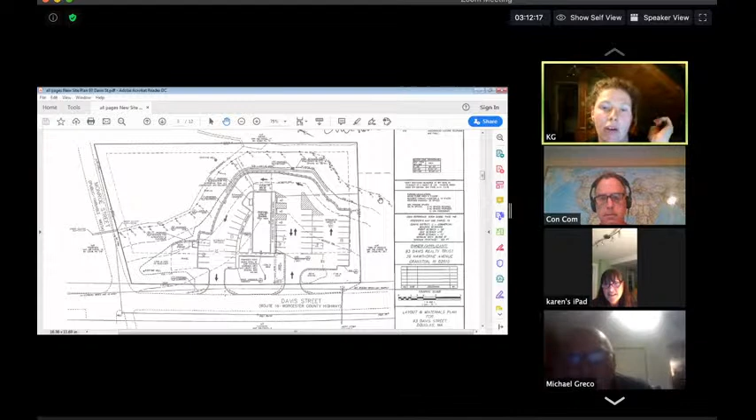Karen, did you have anything else? I just wanted to add a little more to the variance I'm asking for, as far as working within the commercial building within the 75-foot buffer area. Again, it is slab on grade. We do have a permanent wall in the back to deter any kind of encroachment further into the wetland area. Any kind of runoff will be met with catch basins and curbing, going into those infiltrator systems. We're trying to protect the site as much as possible from any kind of interruption into the resource area. Okay, all right, thank you both.

Again, just before I go to the public, do we have any comments from the board, especially comments - I know a few of us did site walks. Did anyone have any reflections or comments based on that? I have a question and a comment. All right, Mark. My question is what's the elevation of the infiltration basin above the water table? Four feet.

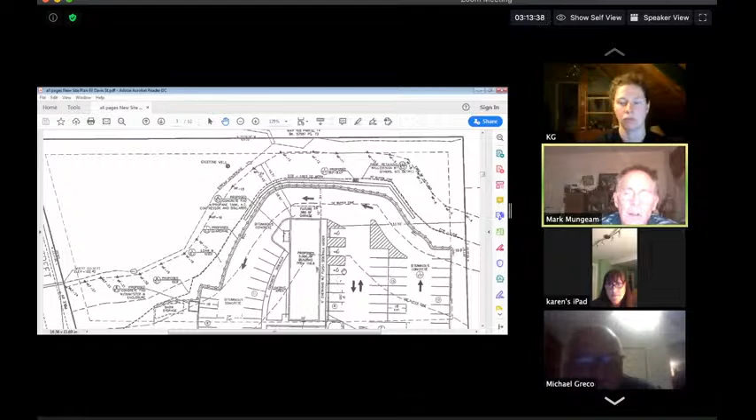Okay. Hi, Paul Hutnack here. How are you guys doing? I just wanted to jump in on that.

It's actually 2.5 feet, the way that I discussed it today with some of the results. But a stormwater system is not a septic system, obviously, and the offset is actually 2 feet. So it does meet that requirement as well.

Are you the engineer for this project, or are you the developer? I'm the developer with Guaranteed Builders, but I worked on the plan.

So like when you do a gravel pit, you have to stay 10 feet above the groundwater, but you're saying you're okay to go within 2 feet of the groundwater for infiltration? There's a 2 foot required offset. For earth removal it's 10 feet, and this is just my understanding of it, I don't know exact, but that's more of a larger project, and that's not a final use of that site. I believe it has more to do with not depleting the site of its naturally occurring soils above the groundwater, more than an offset to an interim final grade, because typically those sites are developed after that.

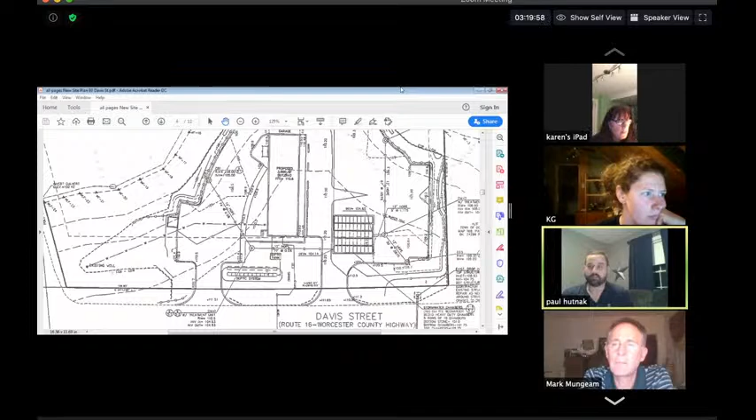And by the time you cut the wall in, that riprap is level with where it comes to daylight in the back at the erosion control barrier.

And that's right on the 25-foot buffer, correct? Correct, yes. Thank you.

Okay, thanks Mark. Those were your two comments? Yes. All right, anything else from the board?

All right, this is still a public hearing, and I would like to hear from whoever else wants to make a comment. Steve, could you stop sharing just so I can see who's all available?

All right, so our first comment, name and address. Jeremy Flansburgh. I live at 63 Monroe, but I abut the property at 83 Davis across the street.

I have a couple of comments for the engineer. I know the property is 2.09 acres, but if you minus all of the wetlands out of it, I don't believe there's enough square footage to put the well, the septic, the building footprint, and this grease and sand interceptor. I've installed them in several school parking lots because I work for the city of Worcester,

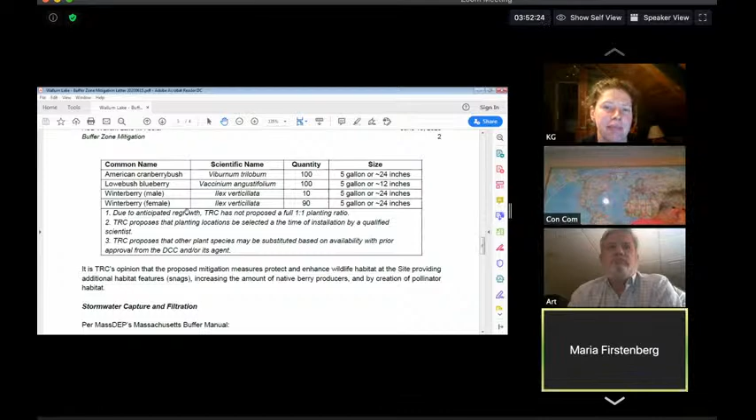So I have here, I don't know if you see it, the types of shrubs that you're planting. I'm looking at them. And you have...

Right, so the buffer zone really offers two major things. It offers wildlife habitat, so the shrubs we've chosen are all considered very high value for wildlife because they're berry producers and such. The other thing the buffer zone does for you is assist with stormwater management, primarily by being there as a buffer for water to hit first when it's coming down, to dissipate it, but also as an obstruction when it's flowing downhill. So the idea of putting in these plants is to fulfill both the wildlife and the stormwater benefits of the buffer zone.

A couple of notes. I know we have a lot of trees proposed to take out, and we've proposed 300 plantings. That's in part because at the last meeting we discussed there's very likely going to be a lot of regrowth since we're not pulling the roots of the trees out. But also because of that, we'll have limited space to actually plant in. So we believe this is about as much as we can reasonably fit in there without making a really big mess.

Yeah, so for all the members, if you're on Google Drive, I just posted it there. It's not in a folder, it's just a PDF underneath the folders that says Wallum Lake Buffer Zone.

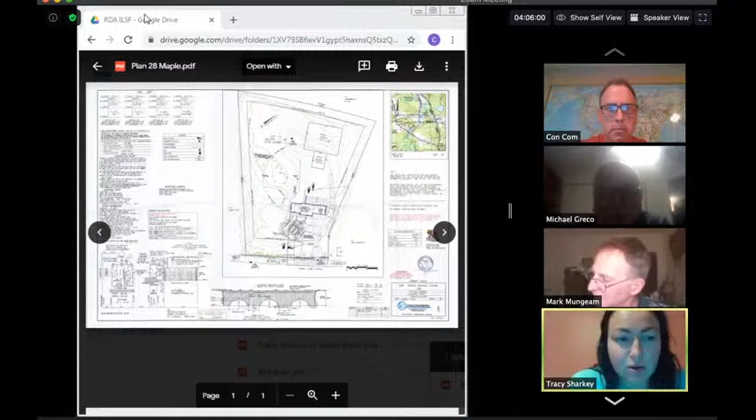The proposed work location will be done on 28 Maple Street and involves a request for determination regarding jurisdictional wetland resource areas as defined by the Wetlands Protection Act. Public participation will be via virtual means only, pursuant to Governor Baker's March 12, 2020 order superseding certain provisions of the Open Meeting Law, General Law Chapter 30A, Section 18, and the Governor's March 15, 2020 order imposing strict limitation on the number of people that may gather in one place.

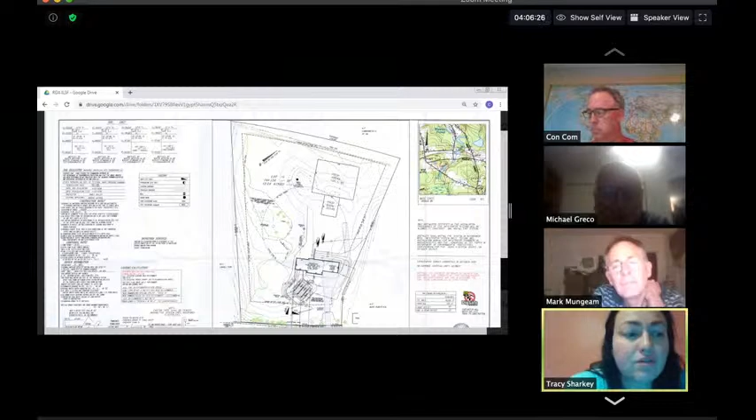This meeting of the Douglas Conservation Commission will be conducted via remote participation. The public may participate in this meeting via remote participation. A website for the meeting will be provided on the conservation agenda posted on the town's website at least 48 hours prior to the meeting. Copies of the RDA may be examined electronically by contacting Maria LaJoy at mlajoy@douglasma.org, May 29th. Okay, welcome, Margaret.

Hello? Margaret's muted. Oh, she's muted herself. I'm trying to get back to the main screen right now. Okay, all right, yes, you're a little quiet, but yes, I can hear you.

Okay, I'm here tonight representing my client, Steve Sanders, regarding an active construction project right now out there at 28 Maple Street. I guess there were concerns. It was back in, I believe, the beginning of May, towards the end of April, regarding the amount of ponding that was taking place in the low point of the field.

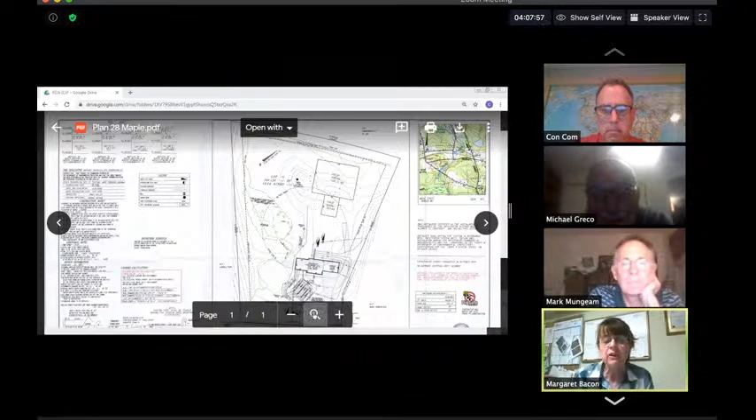That's Steve circling right now, and there is a low point there, and it does pond a little. I did look at that during the design process, and I did the calculations to determine if it was an isolated land subject to flooding, and my calculations say no, it's not. I did meet Steve out there on site back in May, and he wanted me to provide additional calculations documenting whether this was or was not an isolated land subject to flooding. I did provide those documentations to Steve several weeks ago.

I believe that's one of the reasons we're here, to make that determination whether it is or it isn't. Per my calculations, we don't meet the criteria to be an isolated land subject to flooding — about half the size of what's needed to meet that criteria. Most of the stormwater that pools in that area is actually coming from Maple Street. When you do the calculation, there's really no flow coming in from any other areas of the site other than Maple Street, right at the bottom of Maple Street. During construction, they opened up a swale a little more that captures more of the road runoff that goes right into that site now.

So there's — sorry, Steve, you can go first. I put on a Google Drive the conservation handbook on isolated land subject to flooding, the criteria. It gets into the watershed and then how much it goes to it, and there's probably about 3 or 4 different things that you have to meet that criteria. In that handbook, it actually has a couple of examples because it gets kind of complicated on exactly how you determine isolated land subject to flooding. So let me bring up screen sharing here — I don't know if everyone can see the calculation sheet here.

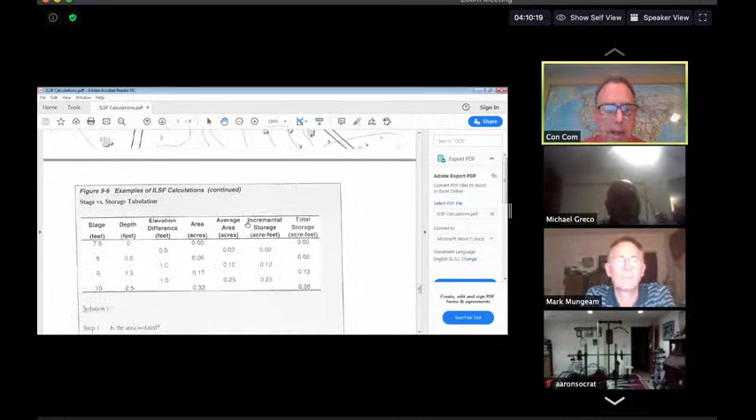So in this figure 9.6, this is an example on determining an isolated land subject to flooding, from the handbook. It says step 1: is it isolated, based on the 100-year floodplain and has no outlet. Margaret went through these and she answered no on a few of them. If you answer no on one of them, then it's not isolated land subject to flooding. So I asked her to just write over the examples so the commission can see the criteria and what's an isolated land subject to flooding.

Just to expound upon that a little, I did these calculations three different ways, and all three calculations pretty much come up with the same thing, which also supports the field observations, what I saw in the beginning. So all my calculations pretty much are telling me the same thing: it's about half the size of what's needed to be considered an isolated land subject to flooding.

And you took the calculations based on what's in existence right now, not what was proposed? Based on the watershed size and the amount of impervious area and the ground cover. Yes.

So when I'm looking at this portion and I'm looking at the pictures, so your extent of the isolated... So do you see the video I have?

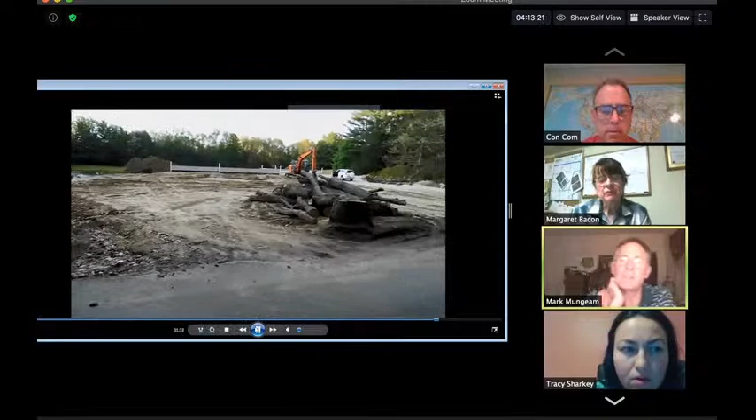Right, because it looks like the material has been brought into the site. Like I'm watching the video right now. Yes, some of that material where the house or where the foundation is looks like it has been imported. The back has not—they just graded the back—but the front, maybe some has been imported. And the sides? Not at the side, only to hold up the foundation.

Right now the wet area or the hollow is to grade. It's what it was originally. Hasn't much change been made. Okay, that's what, yeah, that's what I was wondering.

So Steve, if it isn't isolated land subject to flooding, there's no protections for it, correct? It can be filled, graded, whatever. Right, so there's a couple of things—even for sake of argument, so even if I have the plan up, there's no buffer zone to the isolated land subject to flooding. So if it was, the work they have proposed is outside the jurisdiction of the commission because there's no buffer zone to that area. But if it's not, which the calculations in the handbook stipulate that it doesn't meet the criteria, then it's not jurisdictional. They could fill it in.

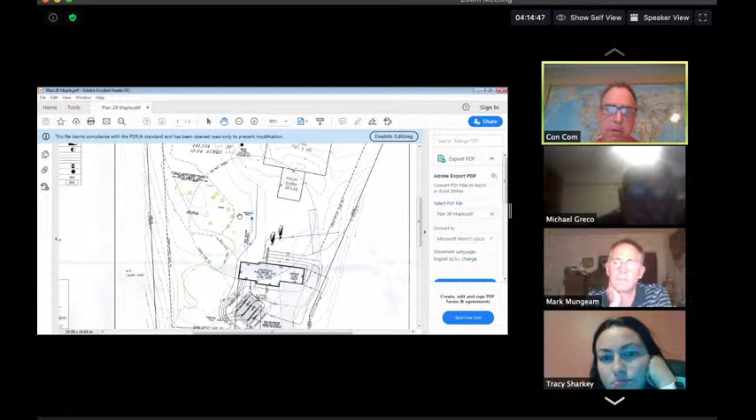And what Margaret did, she put it on the plan because she wanted to know that even though it's not jurisdictional, it does help with some stormwater. So she's recommending that they don't fill it in, just for their own property—it would help them to keep some of the ponding there. It's already a designated area.

Right, and when it comes to isolated land subject to flooding, maybe I'll take the plan off so you can see me. It's kind of tricky. If you walk into the middle of the woods, I think there's one that's farther up off of Maple Street. If you come out of here and go towards Franklin on the left-hand side, you'll see that it's a natural bowl that's surrounded by a drainage area and everything collects in there. It could be a vernal pool.

This area, even if it meets it, it's a little tricky. I personally would look into it because a lot of the runoff looks like it comes from Maple Street. Technically you're not supposed to have an inlet or an outlet when it comes to an isolated land subject to flooding, so I'm not sure if drainage off of Maple Street would characterize as having some type of inlet. But regardless, it doesn't meet the characteristic or the criteria according to Margaret's calculations. Okay, and my client doesn't plan on filling that in anyway.

But I know there was some issue with drainage off of Maple, and Mark looked at it. Other people walked through there, looked at it. I just wanted to say, you know what, might as well nip this in the bud, come in front of the commission, make a determination, get the calculations, so to satisfy the commission, hopefully.